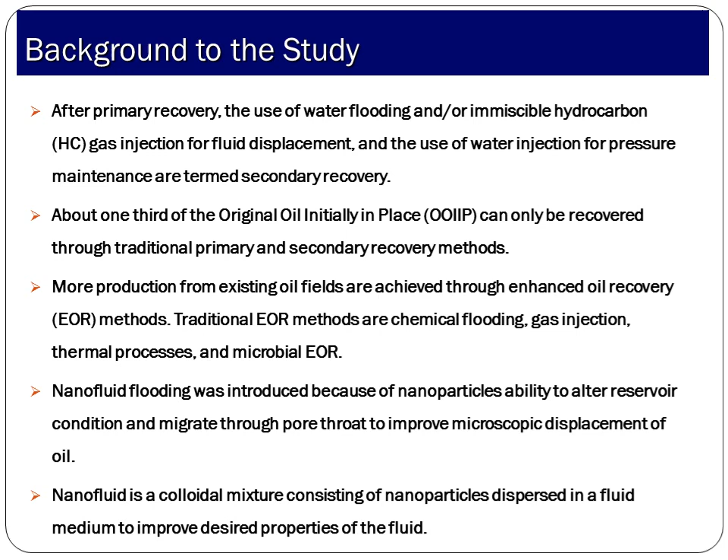More production from existing oil fields could be achieved through enhanced oil recovery, and traditional EOR methods are chemical flooding, gas injection, thermal processes, and microbial EOR. Nanofluid flooding was introduced because of nanoparticles' ability to alter reservoir conditions and migrate through pore throats to improve microscopic displacement of oil. Nanofluid is a colloidal mixture consisting of nanoparticles dispersed in a fluid to improve desired properties.

Statement of problem: Traditional EOR methods are costly, hence the industry is looking for cheaper methods of enhancing oil recovery, though microbial EOR is the cheapest. It is not favorable in high temperature, high salinity, and deeper reservoir conditions. Also, a major drawback in microbial EOR method is bio-corrosion.

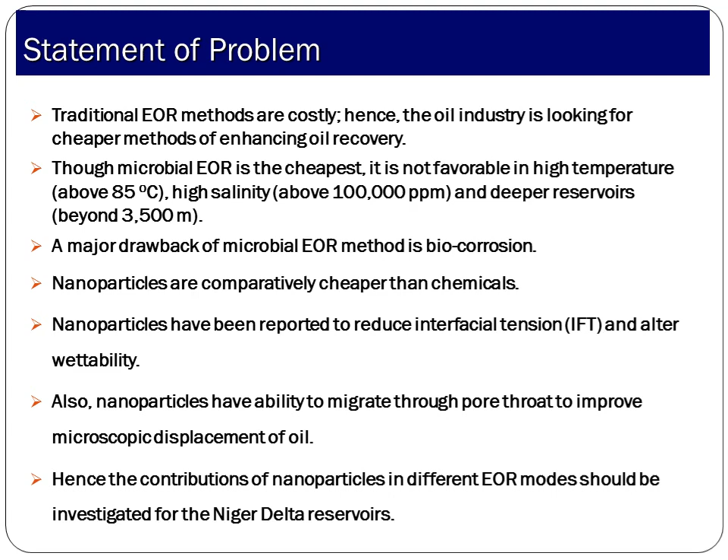Nanoparticles have abilities to alter reservoir conditions. Hence, the contributions of nanoparticles in different EOR modes should be investigated for the Niger Delta reservoirs.

Literature review: The experimental research work on nanofluid EOR was surveyed and presented as shown here, starting with Kanj et al. 2009, Onyenkonwu and Ogolo 2010, down to Omotosho et al. 2019 and Onyemachi et al. 2020.

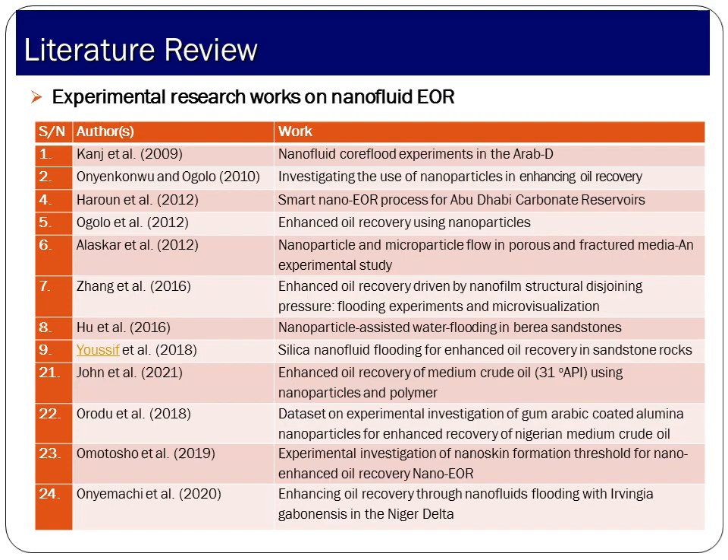Also, as part of the literature review, the review works on nanofluid EOR were surveyed, starting with Kong and Ohadi 2010, Ayatollahi and Zerafat 2012, down to Li et al. 2018 and Agista et al. 2018. Now, materials and method.

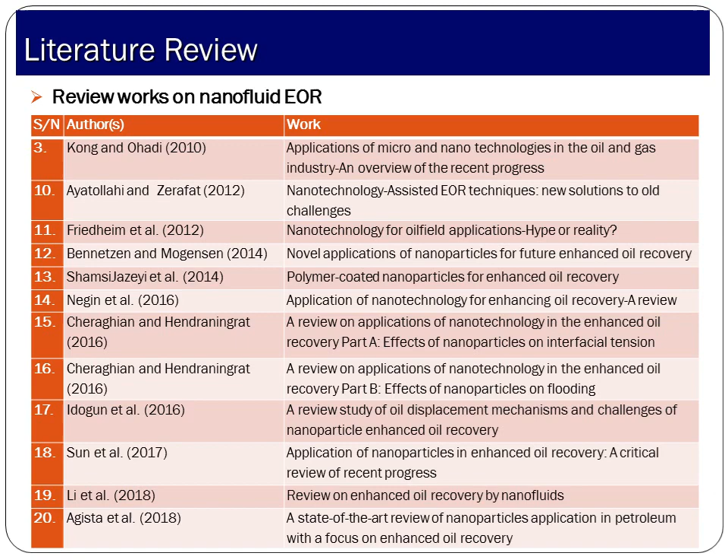Materials used are cylindrical core samples, crude oil sample, brine, Triton X-100 surfactant, and aluminum oxide nanoparticles. Methods comprise determination of density, specific gravity, API gravity, and viscosity of the crude oil.

API gravity is evaluated as 141.5 over specific gravity minus 131.5. Kinematic viscosity is determined by an Ostwald viscometer and evaluated as efflux time times viscometer constant, while the dynamic viscosity is evaluated as kinematic viscosity times density.

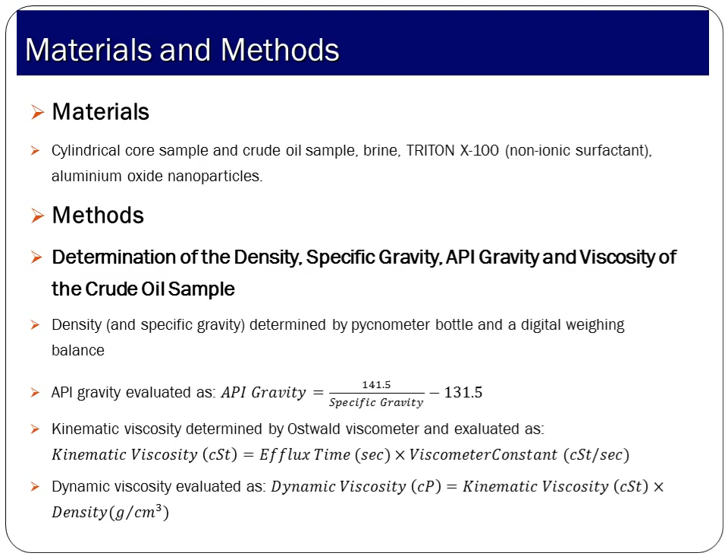Also, scanning electron microscope analysis of nanoparticles were carried out, and crude oil interfacial tension (IFT) was determined using a tensiometer. Also, determination of total porosity and grain density of the core sample was carried out using a computerized ultra-pore porosimeter, where appropriate billets and core samples were put inside to determine the total porosity, grain volume, and density of the sample via the porosimeter software.

Core flooding starts with primary brine flooding. Here, the dry core sample was flooded with brine by a positive displacement pump at a flow rate of 48 cm3 per hour. Effective core porosity was determined as effective core pore volume over core bulk volume.

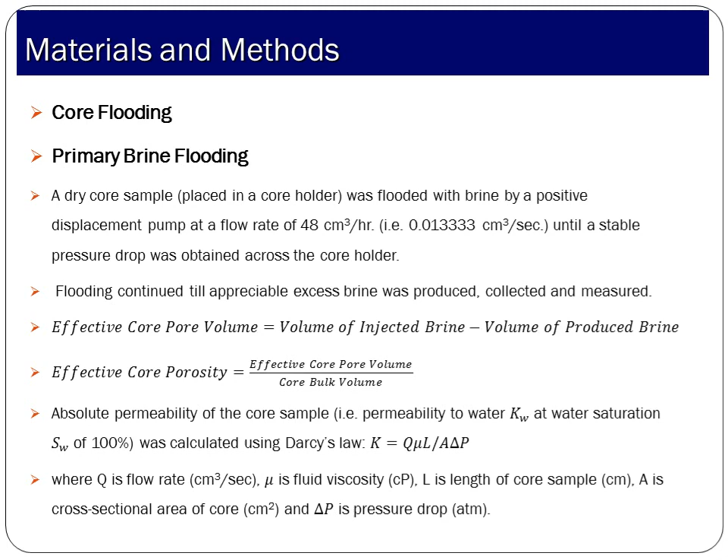Also, the absolute permeability of the core sample to water at 100% water saturation was calculated using Darcy's law: K equals Q mu L over A delta P, where the symbols or parameters have their usual connotations.

Drainage is the process of displacing a wetting phase with a non-wetting phase. Therefore, drainage consists of using oil to displace water in the core sample. Flooding continued as only water was produced, then during breakthrough both water and oil were produced, but was stopped when only oil was being produced at irreducible water saturation.

Also, the endpoint permeability to oil at irreducible water saturation was evaluated using Darcy's law. Then imbibition commenced. Imbibition is the process of displacing a non-wetting phase with a wetting phase. Here, water is used to displace oil in the core. Flooding continued as only oil was produced, then during breakthrough both oil and water were produced.

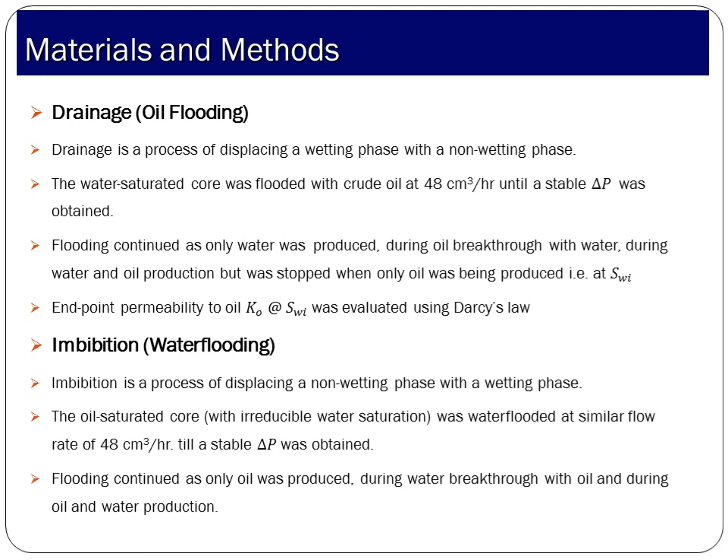Imbibition also continued by evaluating the volume of oil and water produced and delta P across the core, with the aim of determining the effective permeability to water and effective permeability to oil over a range of water saturation. Respective relative permeability to oil and water were also determined to plot the relative permeability curve.

However, it is more appropriate to use endpoint permeability at irreducible water saturation than using the absolute permeability when we obtain water saturation of 100%. This is because the endpoint permeability to oil at irreducible water saturation represents the flow condition just prior to commencement of water flooding.

Recovery factor of water flooding is water flood oil recovery divided by original oil in place times 100. The pore volume of the injected water was also determined.

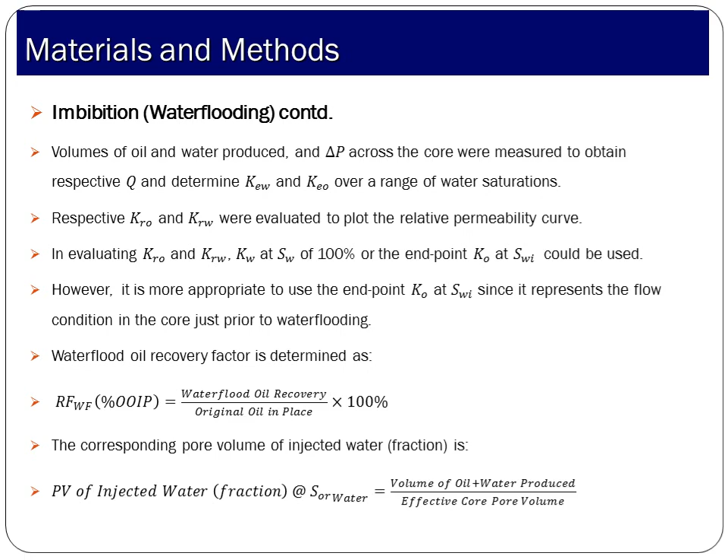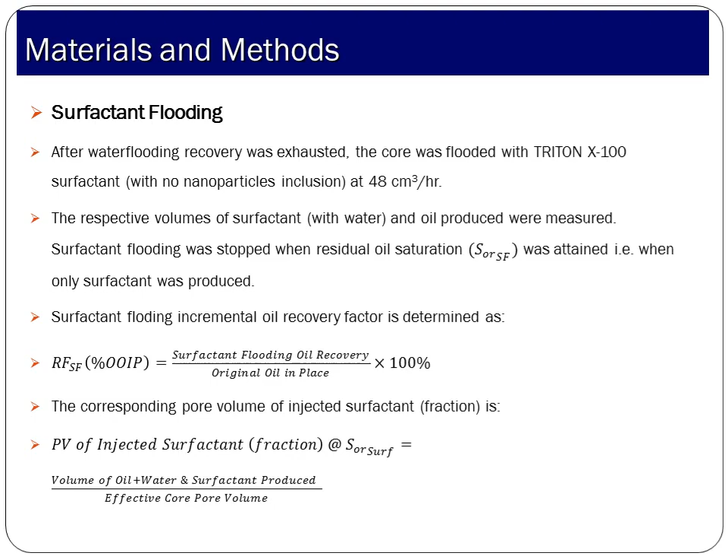Surfactant flooding commenced after water flooding, and here the respective volumes of surfactant, water, and oil produced were measured. Surfactant flooding was stopped when residual oil saturation was attained, that is, when only surfactant was produced, and the recovery factor was determined as surfactant flooding oil recovery divided by original oil in place times 100. The pore volume of injected surfactant was also determined.

After surfactant flooding, nanofluid flooding commenced, and it was stopped when residual oil saturation was attained, that is, when only nanofluid was produced. The recovery factor for nanofluid flooding is nanofluid flooding oil recovery divided by original oil in place times 100. The pore volume of injected nanofluid was also determined, as shown.

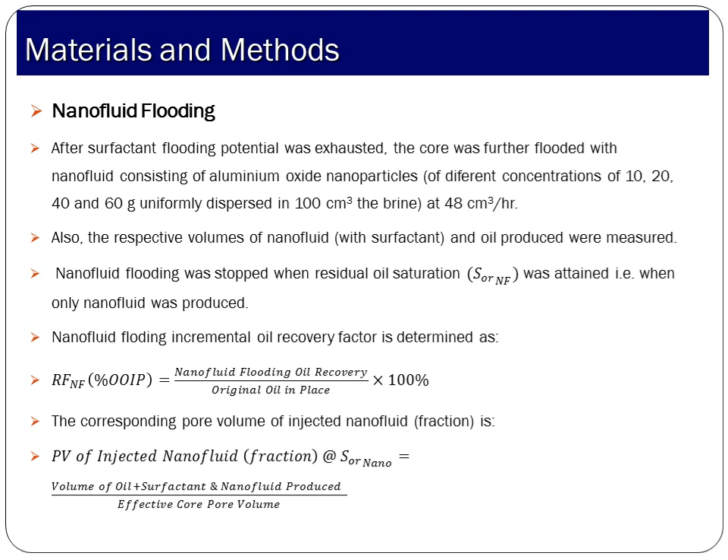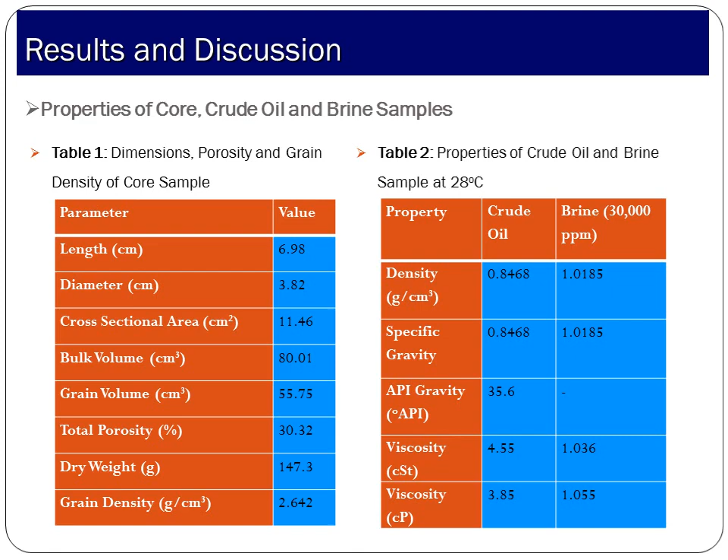Result and discussion. Properties of the core sample, crude oil sample, and brine sample are shown here. Table 1 shows dimensions, porosity, and grain density of core samples, while Table 2 shows the properties of crude oil and brine sample at room temperature, 28 degrees Celsius.

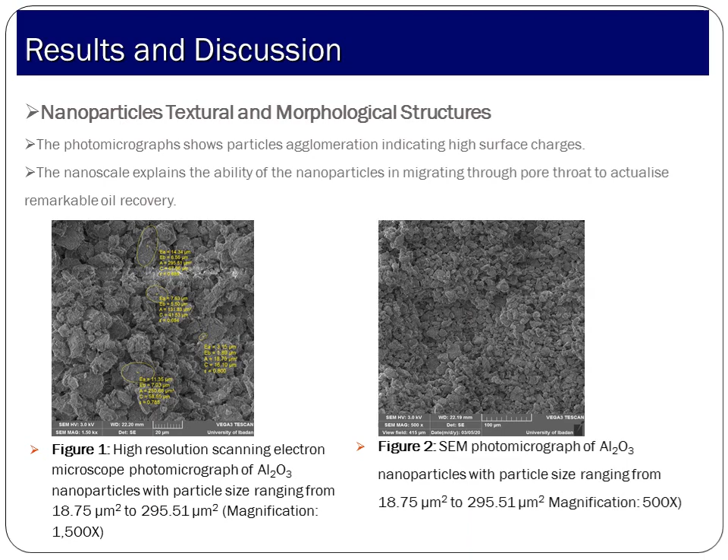Also, the photomicrograph showing the nanoparticle's textural and morphological structure is shown here. Figure 1 is of 1500 magnification, while Figure 2 is of 500 magnification. The nanoscale explains the ability of the nanoparticle in migrating through pore throats to actualize remarkable oil recovery.

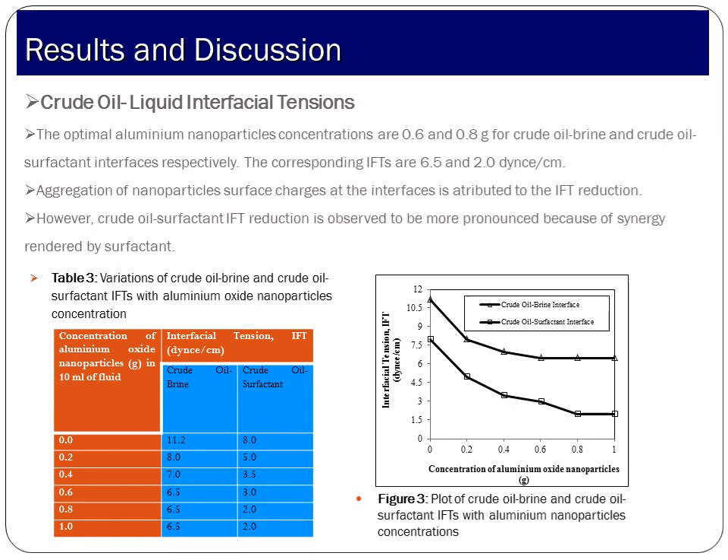Also, the crude oil interfacial tension was measured, and it is observed that the crude oil interfacial tension reduction at the crude oil-surfactant interface was more pronounced than at the crude oil-brine interface. This is due to the synergy of surfactant in reducing IFT.

The result for primary brine flooding shows that the effective pore volume is 23.12 cm3, and pressure drop across the core is 0.197 psig, while the absolute permeability to water at water saturation of 100% was evaluated at 639 millidarcy.

Oil flooding shows initial oil in place of 17.36 cm3, and pressure drop across the core is 0.734 psig. Water flooding shows oil produced as 9.05 cm3 and residual saturation as 8.31 cm3.

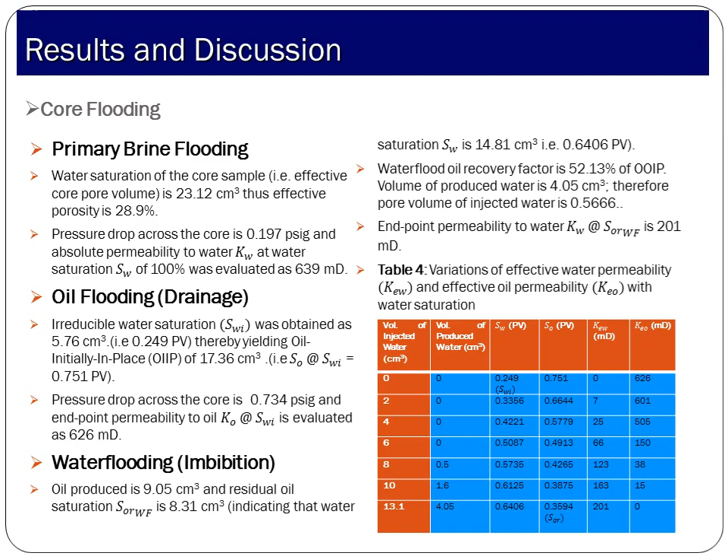It is observed here that as the relative permeability and effective permeability to oil is reducing, the relative permeability and effective permeability to water is increasing.

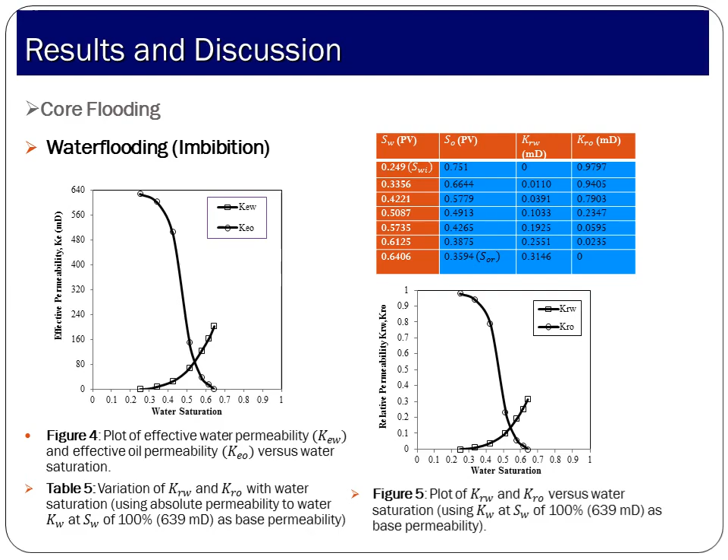It should be noted that KRW plus KRO is less than 1 at the start of water flooding because the absolute permeability at 100% water saturation is used as base case here. It's also noted that KRW plus KRO is less than 1 because of the different viscosity, mobilities, and wettability potentials of oil and water.

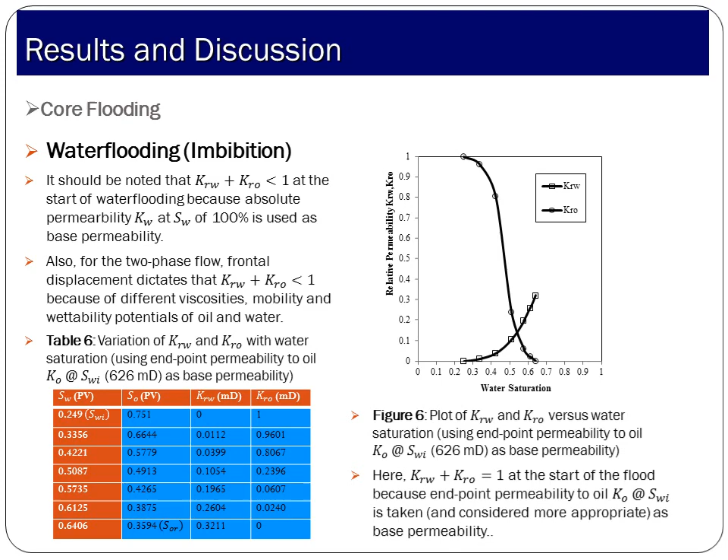Table 6 and Figure 6 show the variation of relative permeability to water and relative permeability to oil with water saturation, using the endpoint permeability to oil at irreducible water saturation, that is 626 millidarcy, as base permeability. Here, it is observed that KRW plus KRO is equal to 1 at the start of the flood because endpoint permeability to oil at irreducible water saturation is used and is considered more appropriate.

Surfactant flooding shows oil produced of 1.01 cm3, and the volume of water and surfactant produced is 9.94 cm3. For nanofluid flooding at 10% concentration, oil produced is 1.1 cm3.

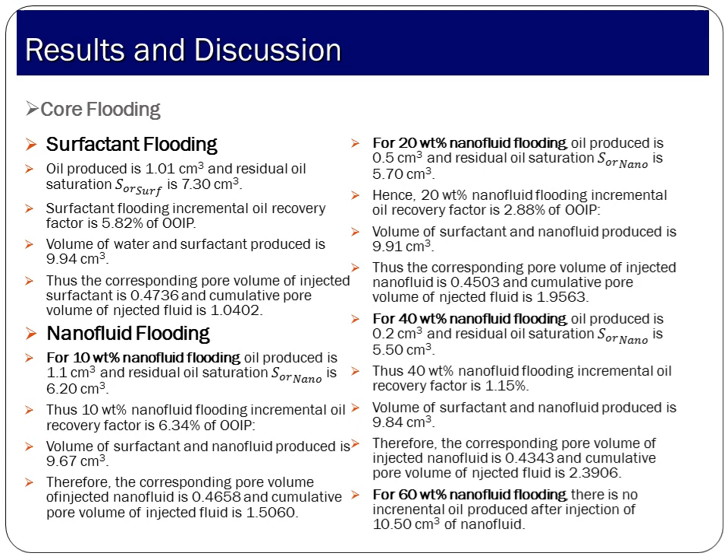For 20% nanofluid, oil produced is 0.5. For 40% nanofluid flooding, the incremental oil recovery is 1.15%, and for 60% weight nanofluid flooding, there is no incremental oil produced after injection.

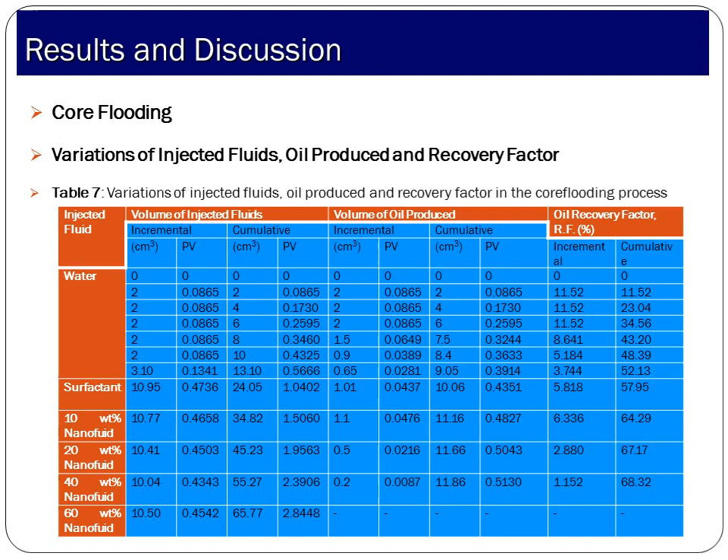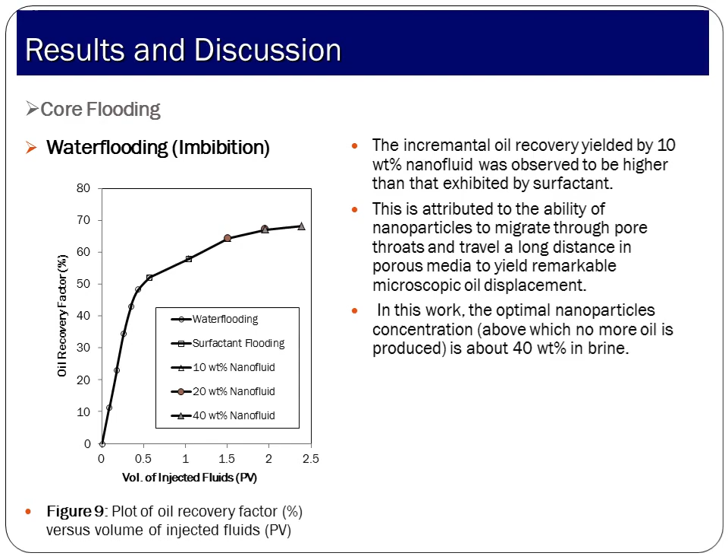Conclusions and recommendations. In this work, nanofluid of 10% weight and particle concentration yielded a higher recovery than that exhibited by surfactants. This is attributed to the ability of nanoparticles to migrate through pore throats and travel long distances in porous media to yield remarkable microscopic displacement of oil.

Significant incremental oil recovery by nanofluid flooding is therefore established in this work to be achievable after the potentials of water flooding and surfactant flooding are exhausted.

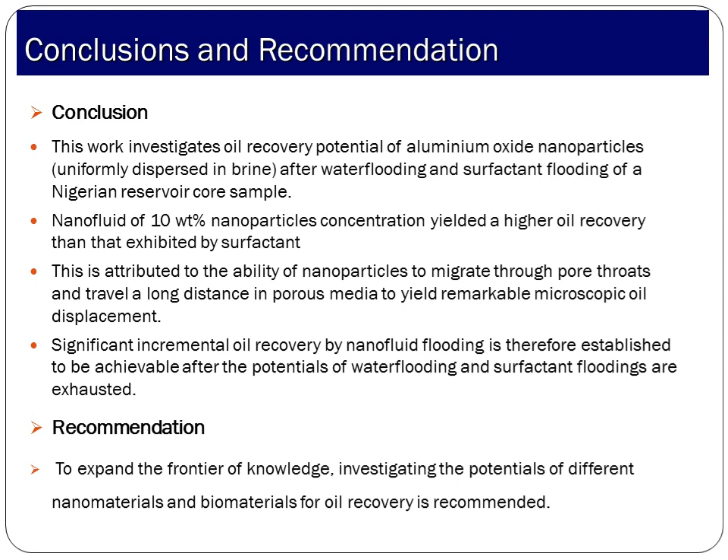To expand the frontier of knowledge, investigating the potential of different nanoparticles, nanomaterials, and biomaterials for oil recovery is recommended.